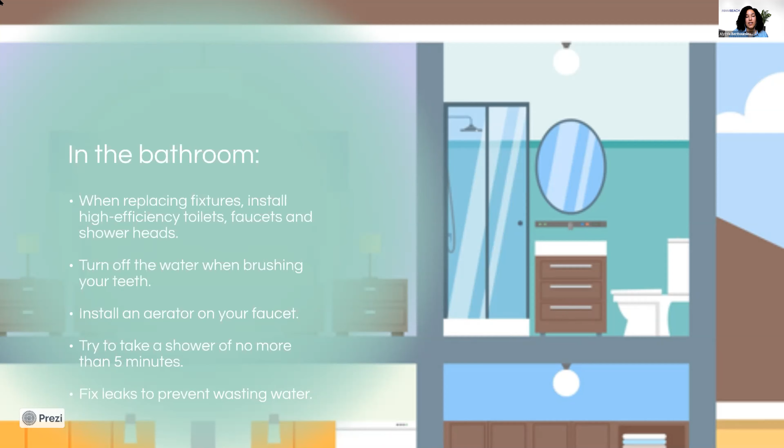Starting in the bathroom, there's a lot of different opportunities that you can reduce water. The first one is to turn off the water when you're brushing your teeth. Also, installing an aerator on your faucet can help reduce the amount of water. Trying to take shorter showers can be difficult, but that's a great way to save some water. And then also fixing leaks. It can be a hassle, but that could be a way that you're really wasting a lot of water. And then also when you're replacing fixtures, making sure that you're choosing high efficiency toilets, faucets, shower heads, whatever you're replacing, to make sure that they are using as little water as possible.

So next in the kitchen, one is light bulbs. This applies to anywhere in your home, switching out old light bulbs with more efficient ones. Also running your dishwasher only when you have a full load. And if you're washing dishes by hand, not keeping the water running the whole time, only when you really need it to rinse the dishes. Also, if you're replacing any appliances, making sure that they're energy efficient. One way is to look for the Energy Star logo, that's one third-party certification that can show higher efficiency.

I'm not sure in the chat if anybody has been sharing any tips, but I'll be sure to go back and see if there's any other ideas.

So next in the laundry area, only running your load when it's full, and washing your clothes with cold or cool water. And then also if there's nice weather, if you have space in your home, air drying your clothes, maybe buying a drying rack and air drying your clothes instead of using your dryer.

Next, in the living room, buying electronic strips so that you can plug in different electronics that you might have, and that's an easy way that once you're done using them to just turn everything off at the same time. Also, anywhere in your house, if you have natural light, taking advantage of that instead of turning on the light during the day. And if you have a space heater, trying to bundle up before using that.

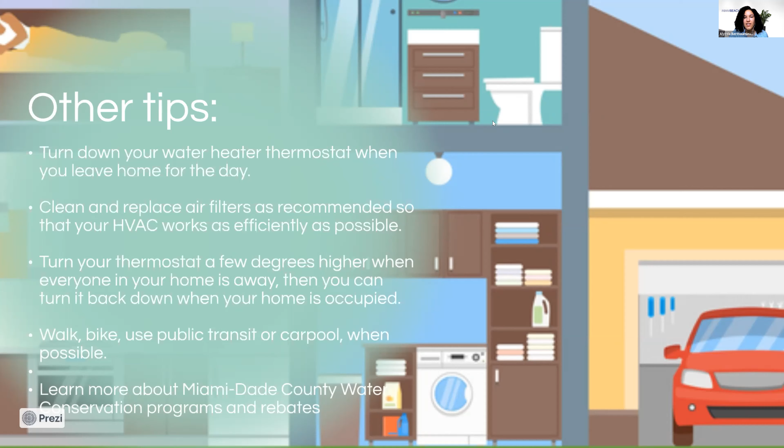Hi everyone, so good to see you. Thank you to the City of Miami Beach for having us. We love being back with Sustainachella, so much fun. So howdy from Nashville. I'm Jennifer Westerholm, I work for the City of Nashville.

I'm going to give you a couple of quick things related to what we as a city do to make sure our buildings are resource efficient and sustainable. Our department manages about 100 facilities, 3.5 million square feet. 80% of those buildings have building automation systems, which means our energy managers can look at all the different systems within those buildings remotely, troubleshoot equipment failures, or manage temperature, lighting, and other systems to make sure we're conserving energy.

About 37% of our total facilities are LEED certified. We have an ordinance in our city requiring new facilities to be LEED certified, so we're getting close to 40% of our city buildings being certified, which is exciting. We also have about 1 megawatt of solar energy produced across 12 rooftops, with over 2,000 solar panels across those rooftops. Pretty proud of that, and we're adding more all the time.

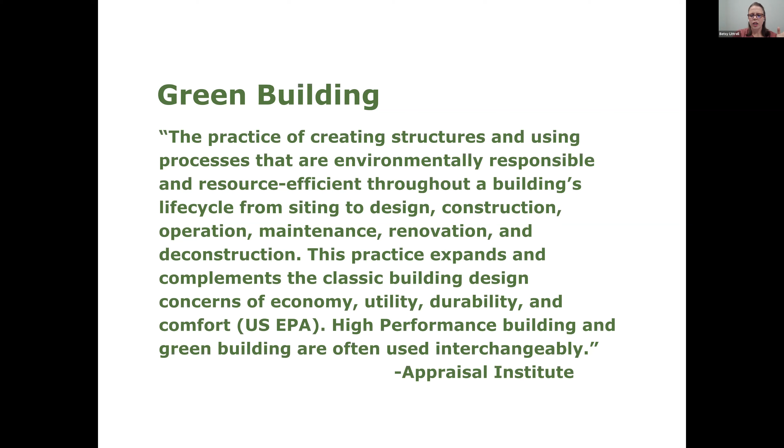So let's keep going here. I'm going to zoom in and out of technical stuff and conceptual stuff. I know we've got a mixed crowd, so trying to give some meat in there, but also not put everybody to sleep.

So renewable resources — obviously it's great, the energy or resources that we use to power, heat, and cool our homes, and do everything they need to do. Using renewable sources versus fossil fuel is ideal for obvious reasons.

In the summer, it uses the earth as a heat sink, taking excess heat from the house and putting it into the earth as a way to save energy. Then in the winter, it takes excess heat from the earth, because the earth in winter is around 55 degrees median temperature, even when it could be 0 degrees outside.

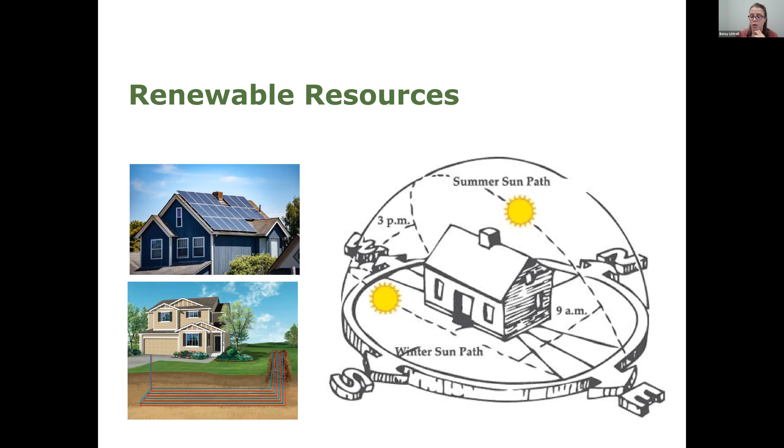So another concept with green homes is resource efficiency. Once you have that resource in your home, how can you use it most efficiently?

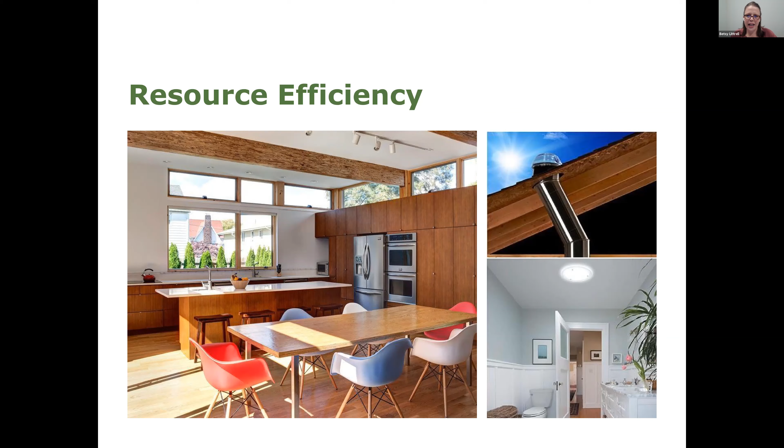Insulation - we'll talk more about that - but it's very important to resist heat flow, to hang on to your conditioned air. You work so hard to get properly conditioned air, you don't want all of that input just going out everywhere.

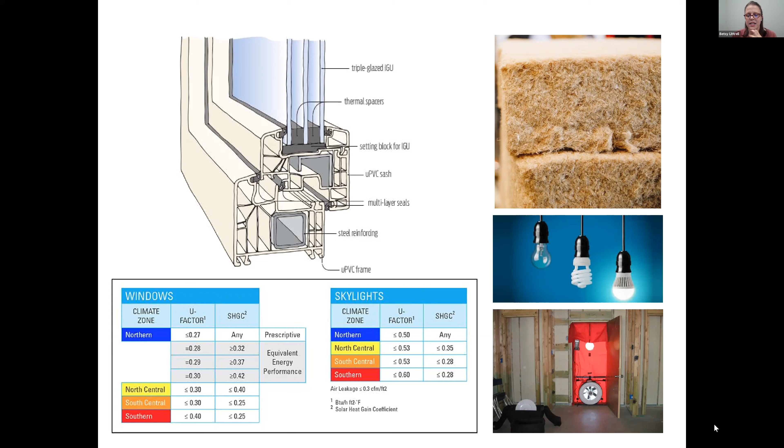Nowadays, the motto is build tight, ventilate right - that's the slogan. There are a lot of caveats to be able to execute that well; it's very important that the execution is there, but it's imperative that we start to build our buildings tight and ventilate them right. So this is a test for that - you depressurize the house, and you can tell how much air the house is leaking.

Typically, you've heard ductless mini splits are a great example. We probably most know them as these boxes that are mounted on the walls. They're incredibly efficient, super, super quiet, and they've come a long way. They've been used across Europe and Japan and everywhere for a long time.

You can get super high efficiency HVAC, heating and cooling, which takes about 35% of a home's energy usage. So making good decisions on your heating and cooling systems has a big payback.

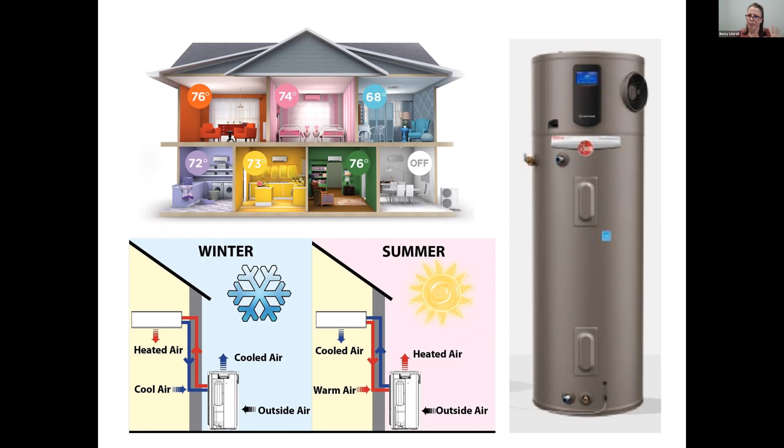Another benefit of this heat pump technology is variable refrigerant flow. I'm getting a little dorky now, but basically you can see here that all of these rooms have different temperatures because they have different zones. This not only translates to energy efficiency but to max comfort as well, because this thing is so smart it can modulate how much refrigerant is given to different rooms for maximum comfort in different zones. So that's a win-win on comfort and energy efficiency.

The idea of the smart home, smart thermostats. As we get into all-electric homes, energy demand management and peak load become important. Obviously we saw what happened in Texas, right? These peak loads and transferring that load—smart homes can help us do a better job than we do managing all of our equipment. So it's definitely part of the solution.

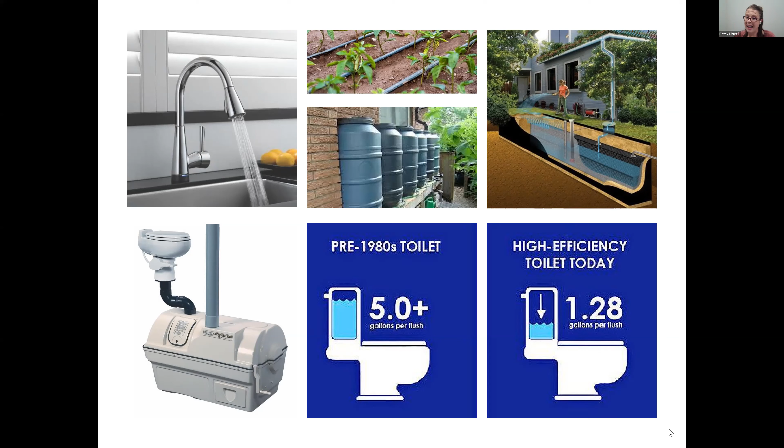All right, next concept: healthy, durable materials and design. Healthy materials, I kind of liken it to organic food. You could have two apples that look exactly the same, and one of them is coated in crazy pesticides you don't want to eat, and the other one's great, would make you healthier. So you can have materials that look the same but are radically different. A lot of glues and adhesives, there's a lot of stuff we put in our food and in our buildings that maybe we don't want to, after we figure out what it is.

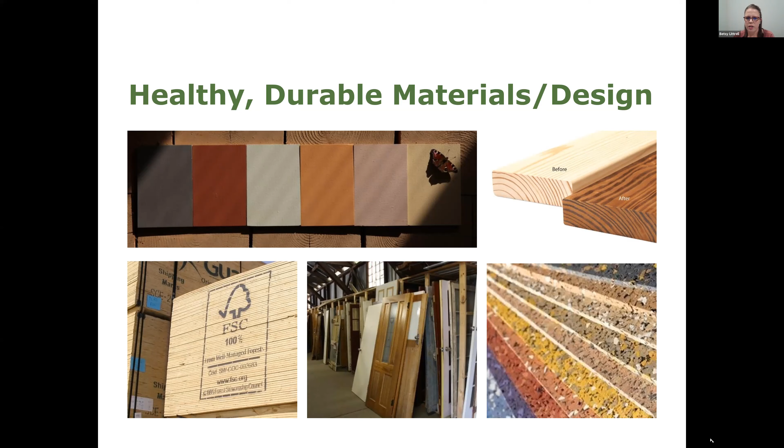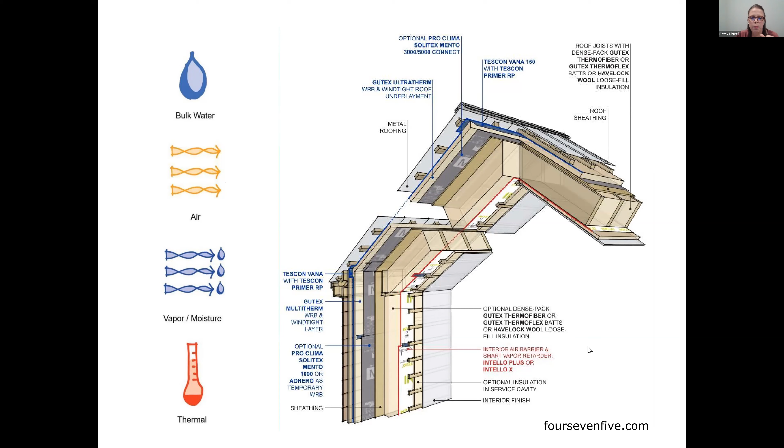Unfortunately there's not a one size fits all. There's a lot of different materials that can do this, and it gets pretty technical pretty quickly from a building science standpoint, but hopefully that's helpful.

Mike just threw in the chat, 'build tight, ventilate right.' Smart and easy to understand and remember. Yes, I must say I didn't coin it, but I share it for sure.

And here's another one: when you buy quality, you only cry once. Some of these things are an investment upfront, but you only cry once, so that's good. And not all of them will make you cry, let me just clear that up.

Betsy, I actually had a question myself. You mentioned your Maypop Build Workshops. Are those virtual or are they in person in Nashville?

So Maypop Building Workshop is actually our architecture and construction company, just a novel name. Maypop is the nickname for the Tennessee state wildflower, it's medicinal, edible, it's the passion flower. So we don't really have workshops as much as it's a playful name saying we're trying to be at the tip of the spear and do innovative, fun, cool projects that aren't your run-of-the-mill, slap it up, crank it out business model. So no workshops based on that name, but we intend to do stuff like that in the future, nothing on the books yet.

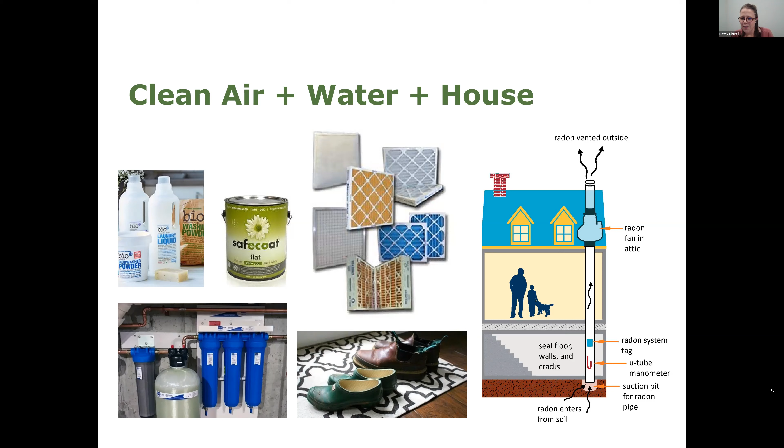All right, so I'm really excited about this next little bit. Here's a big concept. This actually made me very hopeful as a professional that builds things that will exist in the world.

So carbon, right? I'm sure we've heard that. Carbon emissions, this idea of carbon, some people may know about it, some may not, but we're going to learn today. There's two types of carbon: embodied carbon and operational carbon. Embodied is the total tax on the earth for making the thing, like extracting the materials, taking it to a factory, manufacturing the parts, transporting to site, constructing it, using it, demolishing it. That's a lot of stuff.

And that's very important, as we'll see. The other carbon we'll talk about is operating, using and maintaining the building. So collectively as an industry, we've been very focused on efficiency, and for good reason. It's important to be efficient.

But as we continue to make strides in that arena, we need to not only be efficient, we need to be efficient with things that didn't tax the hell out of the earth getting there in the first place. Otherwise, it doesn't matter. It actually has a much bigger impact to use. So let me keep going.

Let's see here. So this concept of a building as a carbon sink. Right, carbon emissions, human activity, climate change, we are all doing things that are making more carbon emissions, and we're warming the planet up. And if you look, we're doing things with a lot of fossil fuels industry, a lot of dirty things that have big impacts on the planet. Flooding, sea level rise, and we've all got tornadoes, just severe weather out the wazoo.

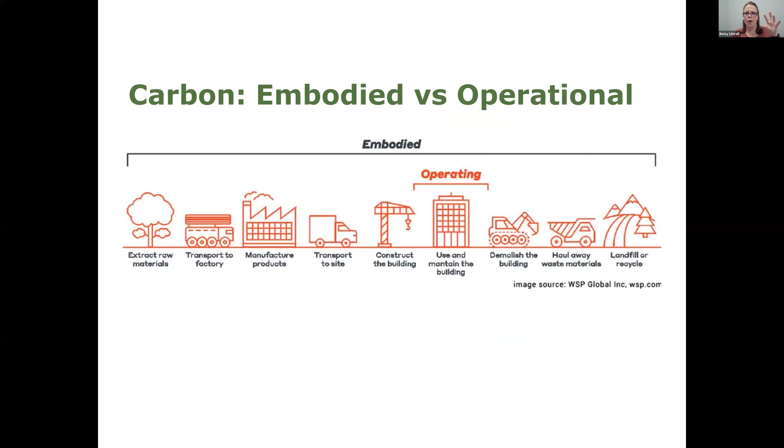So this idea, the building as a carbon sink, I think this is a solution, and this is the low carbon, high performance approach. High performance has to do with operating carbon. We want it to perform, it wouldn't be a high performing building if it didn't use little water, little energy. But low carbon means we don't want to tax the hell out of the earth making the building in the first place, right? So essentially, thankfully, nature knows what to do, and we're just figuring it out slowly.

Plants grow, trees and plant-based products grow, and as they grow, they sequester gaseous carbon, they put it in the roots, they'll store it in soil, which is why regenerative agriculture is really important. They're basically balancing our existence by saying, hey, we got you, we'll put all that carbon dioxide in the soil and in the plants. That's called carbon capture, carbon sequestration in the plants. And then by making building materials with these plants, we're essentially storing that carbon that would otherwise be raising the temperature of the earth. We're storing it in the built environment, and it's going to help us maybe stay alive.

Enough of us do it. Maybe. I hope so, Betsy. I hope so. I hope so too.

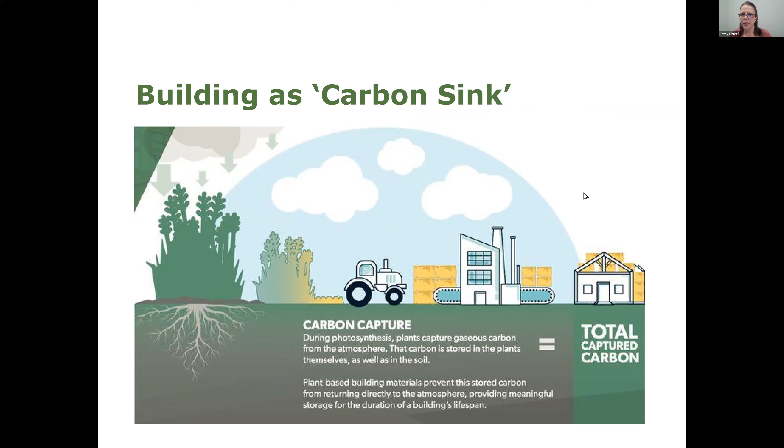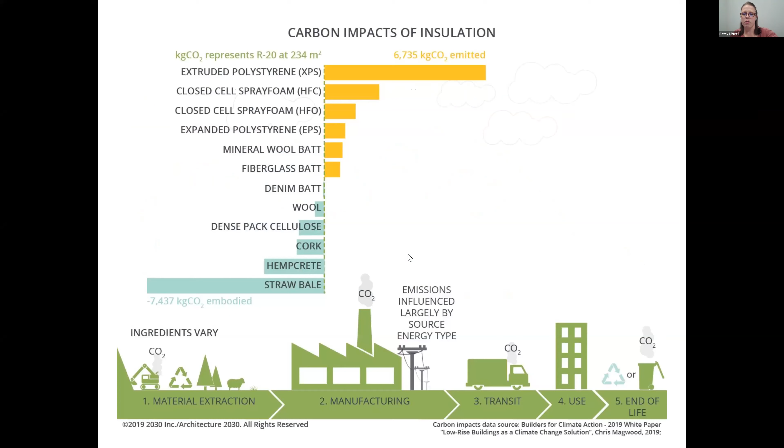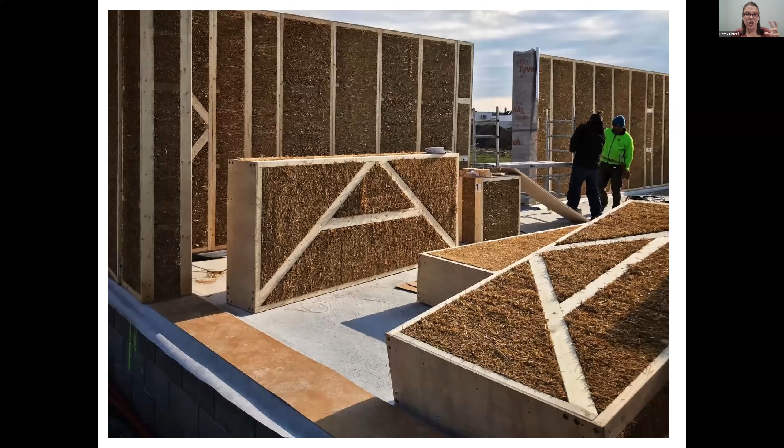Yes, this is a big takeaway. Essentially plant-based. I'm going to show you, and I'll send this presentation to folks if they want. Building with plants. There's a lot of industrially friendly products. Sheet Good. This is a hempcrete house that uses plants in the hempcrete. This is actually giant straw bale Legos. This is badass. Looks like a regular house, but it's made with Legos.

But yeah, green real estate. So why aren't there more green buildings around? Wouldn't that be cool if there were? So first off, there are realtors that have a green realtor designation. So if you can look for folks with NAR's green designation, and this is geared at really kind of tuning up the real estate industry.

So, state of the market: green homes are becoming the expectation. They're becoming more required as resource efficient homes by energy code. Most of the drivers are cost savings, health, sustainability, and lifestyle. But there's a big murky bubble that's different in different markets between price, cost, and value.

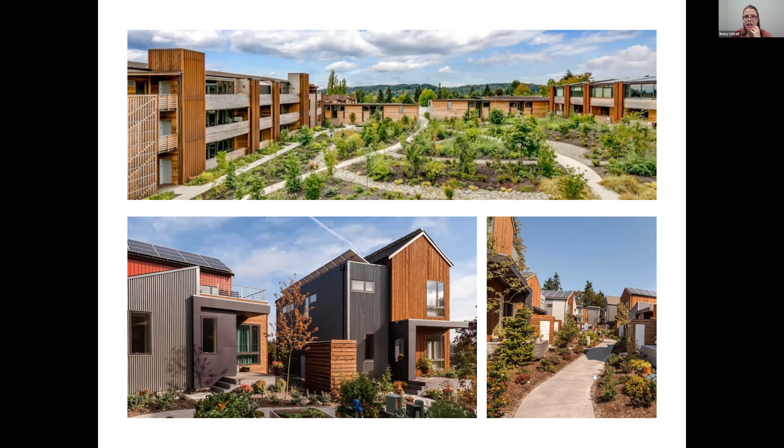Just really quickly, this is Grow Community, an aerial view. Look how cool this is, super dense, on Bainbridge Island. You can see the site plan notches them around. They've got solar panels, using a one planet living concept, with stacked flats and detached single family homes. The homeowner association actually covers maintenance of the grounds, which is really cool, so you can have edible landscapes and rain chains—how cool is that?

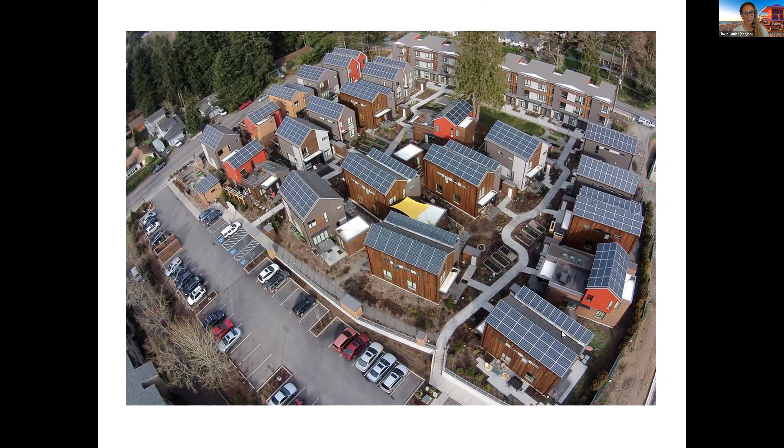How many green homes have you built? So how many green homes at Maypop Building Workshop itself? We are just about 2 years old, so we've come out of renovations and custom carpentry, that's our particular company. I was a licensed architect at a lot of firms in Nashville doing big mixed-use, multifamily infill that's going on in a lot of cities. I have some clients I'm shopping for land with, and we're going to design and build a really cool green A-frame. So I'm just getting started on my own personal home, my own personal project. But I've been involved in a lot of different projects in a lot of different ways.

And then how did you get into this industry? How did I get into it? I didn't have a troubled past like some people do in design, I just miraculously ended up going to college. I thought I was going into engineering, and I had an English teacher that had us define a career. Engineering started to look a little black and white, and then architectural engineering was in a book, and I was like, that'd be cool. And here I am - after 13 years, I was a licensed architect.

Awesome, thank you so much, Betsy, we really appreciate it. And Noel had questions about folks working with green building in Miami Beach, Miami-Dade County. I know we have a lot - if you look at green building designers, folks that are LEED AP - Alicia, please put LEED AP in the chat so he knows what I'm talking about. You can definitely find folks that do that, they pretty much design green homes, green buildings, so we do have those professionals here in Miami-Dade County as well. If Betsy, you want to move to Miami, you're more than welcome. Miami Beach, ooh really, I'll get my license there and come beach it up, we'll look at things at the beach. No, but the American Institute of Architects has a committee on the environment, that would be a good place to start. And there's also the United States Green Building Council, a great place to start trying to find folks on that front.